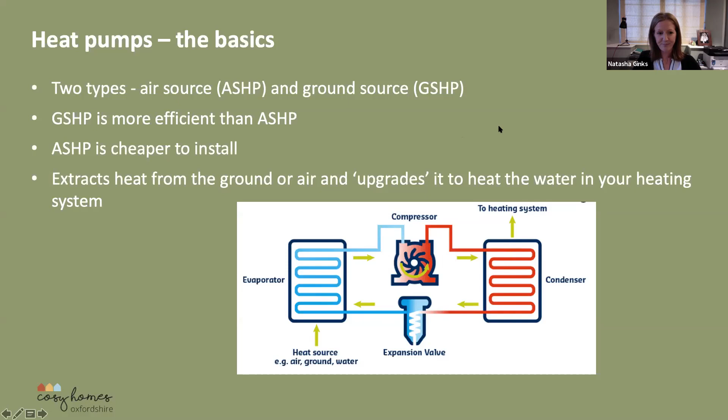The best type of soil for horizontal ground source heat pumps is basically wet, soggy clay soil, because it holds its temperature better. But if you don't have sufficient land, then you can dig down and create boreholes. There you have to go down about 15-20 meters, and an 8 kilowatt heat pump would require about 1 to 2 boreholes. That is not very commonly done in the UK, because digging down is a lot more expensive. You have to have a lot of equipment, and it can add about 20 or 30% to the cost of the installation. So not many people tend to do that.

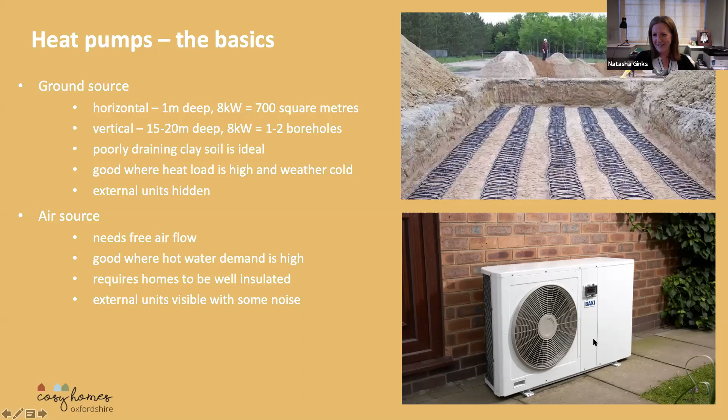I think air source heat pumps do require homes to be fairly well insulated, and we'll look at that in a while. And as you can see, there's an external unit. There's a bit of noise that comes off it, but again, if it's correctly located, then it doesn't need to. And Tim can talk about this because he's got his located just outside his back door, and he can tell us how noisy it is in a while. So we'll just do the next.

So I so often get asked the question as to which houses are suited to heat pumps. And it's really hard to say, oh yeah, these houses are and these houses aren't. It really depends; it should be looked at on a case by case basis. But what I've tried to do here is pull some examples of houses where I think they can work and where I've seen them work well. So obviously they're good with new builds.

But having said that, if you are building a passive house, the really, really well insulated houses now don't actually have heat pumps in them, because they're so well insulated that the cost of installing a heat pump is ridiculous compared to the amount of heat that they actually need. So if you're building a standard new build, then a heat pump will be appropriate. Passive houses tend to look at just very, very small electric radiators now.

And then if you're looking at existing houses that are going to be retrofitted or have been retrofitted, then air source heat pumps in particular will work well if you've got a significant amount of insulation. So definitely loft insulation, and usually some wall insulation as well, either internal or external, and definitely cavity wall.

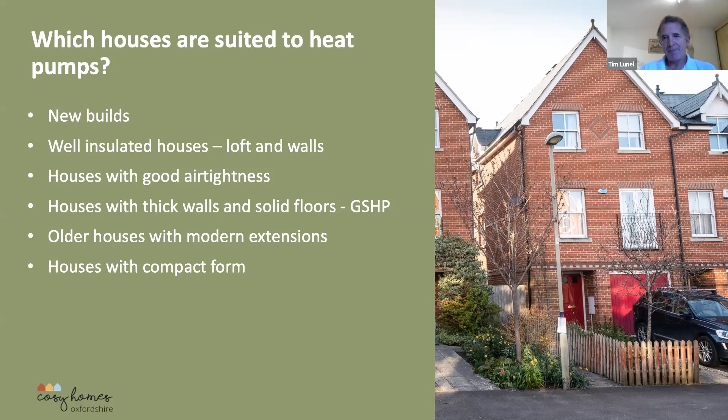Yeah, I definitely agree with that. Okay, let's move on to the next slide. So I'm just going to quickly run through what I think are quite challenging houses to heat with heat pumps. Old timber frame houses are very tricky because they tend to have very thin walls. They've got wattle and daub often. They don't have the thermal mass. So I would be pretty careful about installing a heat pump on an old timber framed house.

Likewise, I think single skin Victorian houses are quite tricky as well. The Victorians built their houses in quite a rush, in the industrial era, and they tend not to hold their heat very well. So on a Victorian house, I think you would have to do a fair amount of wall insulation in order to make sure that you could heat the house to the required temperature without a huge expense of running your heat pump.

And then, as I said before, drafty houses with leaky windows, I think you would have to do quite a lot of work on your windows and on the air tightness before installing the heat pump. Again, uninsulated suspended timber floors would need to be insulated prior to putting your heat pump in, because you lose so much heat through them.

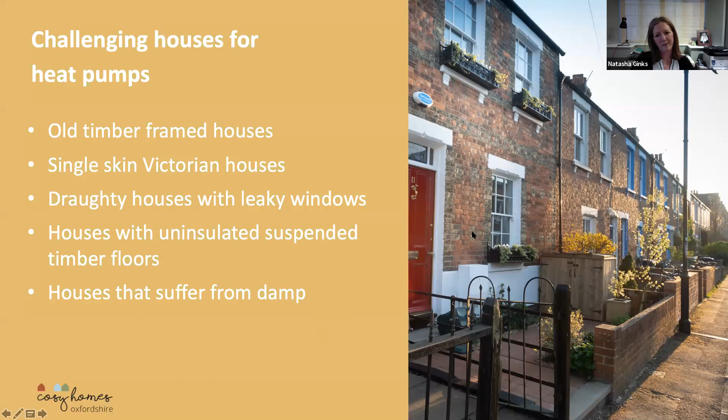Okay, so these are some common misconceptions about heat pumps that I've had myself, and that clients I've talked to have been surprised about. Heat pumps are weather compensated, which means that they're controlled by the outside temperature. Unlike the way a gas or oil boiler often works, where you've got an internal thermostat controlling whether it's coming on or off, with heat pumps it's literally to do with the outdoor temperature.

When the outdoor temperature falls below a certain point, the heat pump comes on, and it essentially stays on. For building regulations, it does require you to have an indoor thermostat, but the heat pump is really controlled by the weather outside, not by that internal thermostat. And this is another thing people sometimes find hard to get their head around: they do tend to stay on the whole time through the heating season.

I switch our heat pump off in the summer. I don't actually need to do that because the weather compensator would just turn it off, but I do it anyway. They tend to stay on all the time, and you can have them on a night setting, so they work less hard during the night if you don't want the house to be so warm. But they are on most of the time, depending on the outside temperature. They do work with radiators as well as underfloor heating.

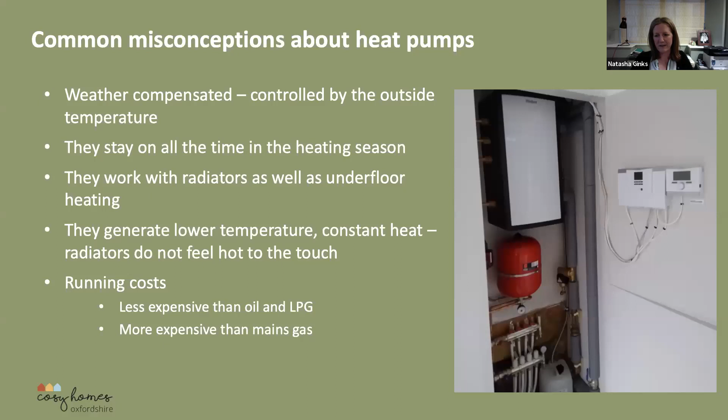So I think it's really important when you do an installation to make sure that the installer gives you running cost estimates, and they always should do that under MCS.

Okay, so do's and don'ts of heat pumps. I think it is important, particularly with an air source heat pump, to carry out insulation and air tightness improvements beforehand. Make sure that the heat pump is optimised to the UK climate. Any good heat pump installer will only recommend heat pumps which are right for your house and your area. But it is important, because if they have to constantly defrost because they're not optimised for the UK climate, then they use more and more electricity.

This is quite important actually, to check your electrical capacity, because heat pumps require a lot of electricity, and if you're installing more than a 15 kilowatt heat pump, then that needs its own supply of three phase electricity. Most people have 100 amps coming into their house, and you have to be quite careful that once you've got your heat pump running, and you've got an electric cooker, your car charging, or your kettle boiling, things aren't going to trip because too many things are drawing on that electrical load.

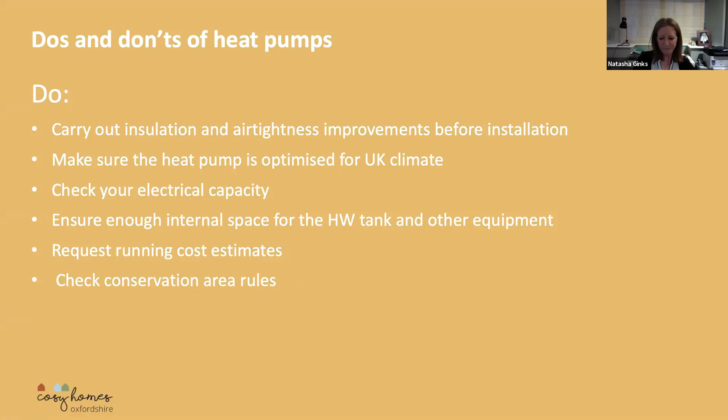And then the don'ts of heat pumps. So I really wouldn't go for the cheapest quote on a heat pump. I think the design and the installation is absolutely key to good performance.

And actually, the Energy Saving Trust did a research project over about 6 years, investigating how heat pumps were performing relative to what they said they did on the packet, and some of them massively underperformed, and some of them actually quite significantly overperformed. And the conclusion was that a lot of the time that was down to how they had been installed. So I think it's really important that you make sure you go for somebody who's done it quite a lot, and they really know what they're talking about.

Yeah, be careful not to undersize your hot water tank, because it takes longer to heat a tank of water using a heat pump than it does using gas or oil. So just watch for that one. Yeah, it's much more efficient if the heat pump's located close to the plant room. And I'm sure no one would do this, but don't buy online and install yourself. You need your installer to be MCS registered in order to get the grants and everything.

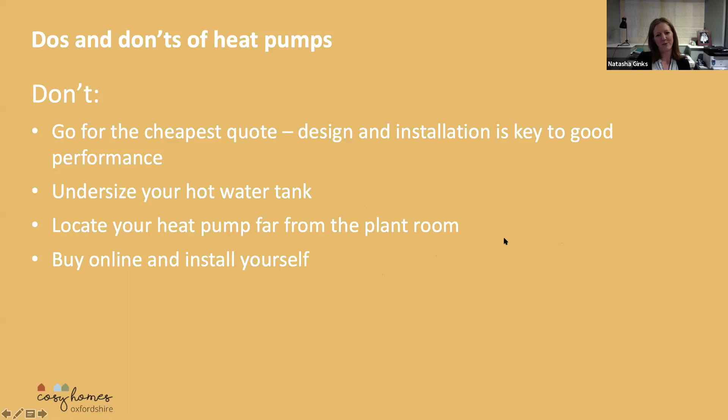Okay, so I won't go into too much detail because I don't want to run over, but why are they good for the environment? Tim and I had a quick 10-minute chat before this, saying that 5-10 years ago, heat pumps weren't necessarily massively better for the environment, because the grid electricity hadn't decarbonised to the level that it has today. So I think that is one of the reasons why heat pumps have become so much more attractive, because the electricity that's used to power them has so much fewer emissions attached to it than even 5 years ago.

Also, it's quite nice that you're not producing any emissions locally, so you've got cleaner air, and I think that's definitely true if you're replacing an oil boiler. The efficiencies of air source and ground source heat pumps can be 250 to 350%, compared to some of the best gas boilers at 90%.

So if you combine them with solar PV, they can reduce your grid electricity consumption. Again, you have to be a bit careful with managing that, because the heat pumps are working really hard in the winter months when the solar PV isn't necessarily generating that much. But in the spring and autumn months, solar PV can reduce your electricity consumption, and also for the hot water. And anything that we can do to phase out oil, so it doesn't get transported across the world with all the risk of spills, is a good thing.

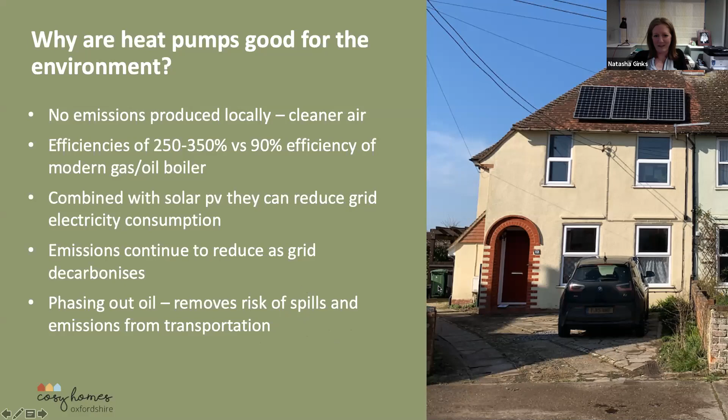And then I'm just going to quickly, are we all right for time, Tabitha? Yeah, you're okay. Yeah, just about, okay.

So I'll quickly run through, there are a couple of grants for heat pumps. I'm sure you've all heard about the Renewable Heat Incentive. There's a non-domestic one as well, which can apply to houses with annexes or outbuildings, but in general most people are on the domestic tariff. It pays quarterly over 7 years. It's based on the annual heat and hot water demand of your house, although that is actually capped now. For air source heat pumps, it's capped at 20,000 kilowatt hours. For ground source, it's capped at 30,000 kilowatt hours.

If your house requires more than that, you can still install the heat pump. They'll just only pay up to that annual heat demand. If your house has got cavities, it would require the cavities to be filled, and it also requires the loft to be properly insulated. Solid wall houses can have heat pumps installed. It's not a requirement to have internal or external wall insulation.

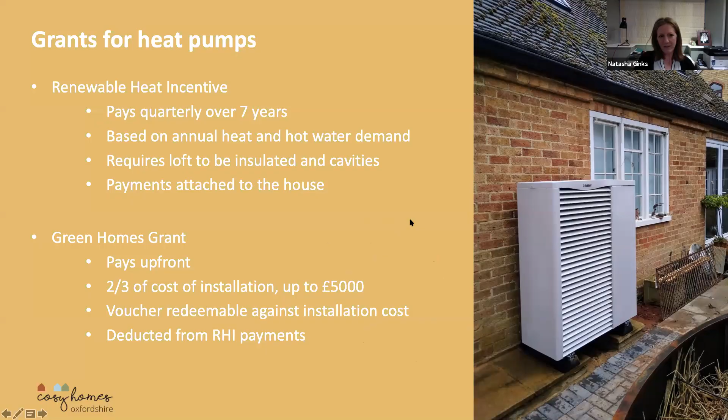Okay, and then just the last slide. These are a couple of things mainly from my own experience. Actually, I didn't have this on our heat pump because we had it installed quite a few years ago, but I think it's really important to make sure that your heat pump can be programmed to heat your hot water independently from the heating. I say this because in the summer months, if you've got some solar, for instance, you want to make sure that the solar is running the heat pump and heating the hot water when the electricity is being produced during the daytime. So you want to make sure that you can program that heat pump to heat the hot water at the right time.

Again, I mentioned the thing about watching your electricity supply. One of the houses we're doing the heat pump on at the moment, they've actually got to keep their gas supply for their cooker because their electricity supply isn't big enough when they've got their heat pump and everything else running. So that's just something to bear in mind. Make sure you carry on monitoring your electricity tariff, because you are using electricity, and it's expensive when you're using that to heat your house.

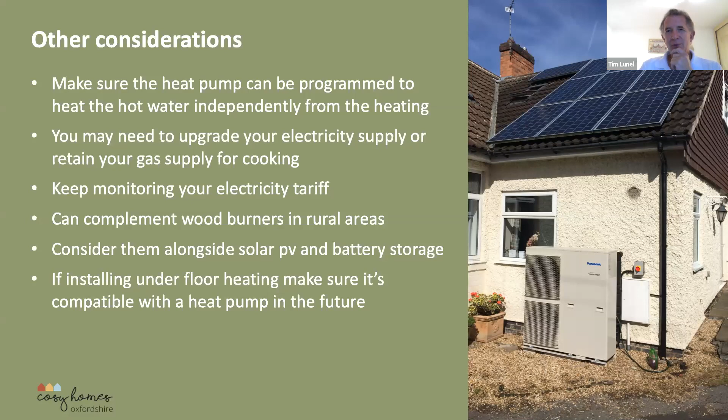Yeah, grand. Just need to stop sharing so I can share, Natasha. Yeah. Perfect. Grand. Hopefully people can see that as well. I haven't got so many slides, just really give a flavour of things.

There we go. So why is it that we went down the route of an air source heat pump? We actually did look at this a decade or so ago, because we're an off-gas community, so you've got no option for gas in the first place. We really are keen to get off oil. Interesting you talk about oil spills, because the early part of my environmental career was actually responding to oil spills. I was up at the Braer incident in Shetland. I was over at Sea Empress. I know what happens when oil gets spilt at sea. It makes a mess. So that's one of the motivations, to get off oil. Absolutely.

When we looked at it 10 years ago, the grid electricity was higher in carbon content, so we didn't feel like we were making such a big saving if we moved to an air source heat pump, particularly in a building which needed insulation work done to it, so we didn't go for it. And we weren't keen on biomass, particularly my wife wasn't so keen on the wood pellet side of things, the physical part that's involved.

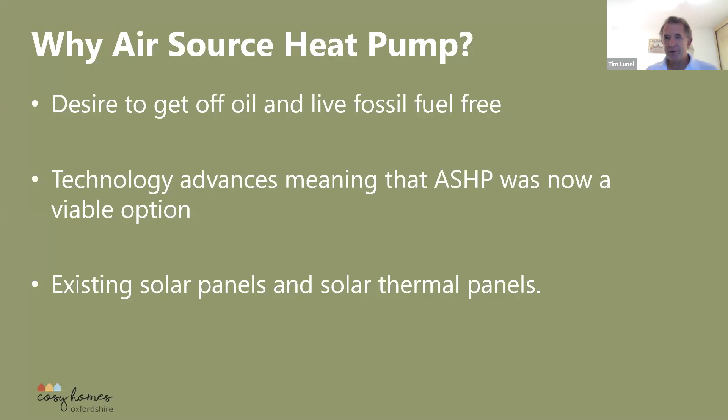We had done quite a lot of other things in terms of making sure that the basic insulation had been done, and we had solar PV panels and solar thermal panels, so how can we make sure we work with that? So that was the kind of motivations of why we wanted to do it. Just some pictures of some different parts of it.

So, we talked about how aesthetically pleasing is an air source heat pump. Well, I put it to you that on the left-hand side, a whacking great 1200 litre oil tank is a good deal less aesthetically pleasing than a 1 metre by 1 metre air source heat pump. It sits there out in the drive.

I saw in the chat people said, how far can you have it from your home? Our home is actually, does my arrow come across on the screen or not? Can you see my arrow moving?

Yeah, so this is the driveway here, and to the left, separated by about 3 metres, is the air source heat pump, with a really well insulated pipe that comes down the drive and across. That's partly to make sure it was in a space which wasn't, we've got a very small garden, so that's why a ground source heat pump really wasn't an option. And it also removed it from being right where we are in our small back garden.

The ideal in terms of efficiency is to have that link as short as possible, but again, the technology has improved, so 2 or 3 metres of really well insulated thermal pipe works absolutely fine as well. So that's the aesthetics around the air source heat pump itself and where it was located.

As I said, we're delighted to have that out there, and you'll see it's actually on a drive that people come past. I've already had quite a few conversations with people going, "Oh, what's that there? Why is that? What's replacing the oil tank there?" So again, it's got people thinking about it. So that's good in itself.

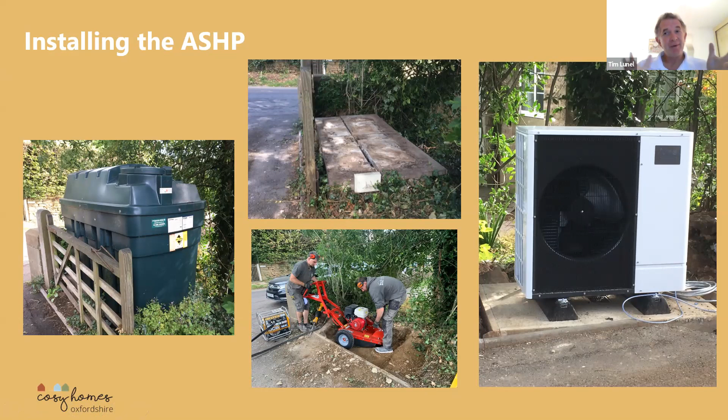Hot water tank, we definitely did not undersize our hot water tank. I'll be honest, it was slightly larger than we anticipated. It was partly a supply issue. It was originally going to be about this height, so a 200 litre tank. This is a 300 litre one. But to echo what Natasha was saying, particularly as we've got solar thermal panels that can top up in the summer,

I've had the solar thermal panels since 2005. But it's interesting, even though it was in September that we had it installed, I could already see in that short period of warm weather that I can now use my solar thermal panels much more efficiently, because I can heat this hot water tank over time and really capture all that solar thermal. And as Natasha was saying, it also means you've got that thermal store there for the air source heat pump if you're using your PV to heat it as well.

So yeah, it's not a small cylinder, but if you can tuck it away in the corner like that, it really does help on the efficiency. So absolutely endorse what Natasha was saying there.

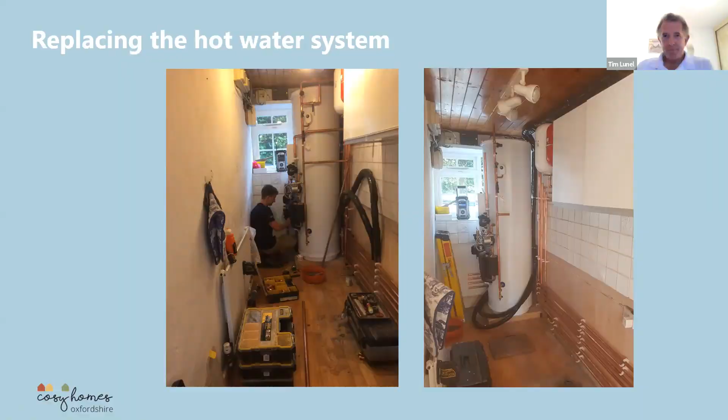And then the insulation part of it, so the front of the house is solid stone, it's ironstone. The back of the house is an extension in a mixture of 70s and things. And it was interesting in the survey that Natasha did that this central portion of the house is where we had an extension in 1996, making sure we were meeting building regs.

At that point in my life I was doing oil spill response, so I wasn't in the energy and building side. So I didn't know to insist that not only are you meeting building regs from 1996, you need to go above it if you really want a properly insulated home. I find it really quite staggering that out of so many different parts of the home, the bit from 1996 is the one that needed addressing, but it absolutely needed it; that's a room that used to get cold.